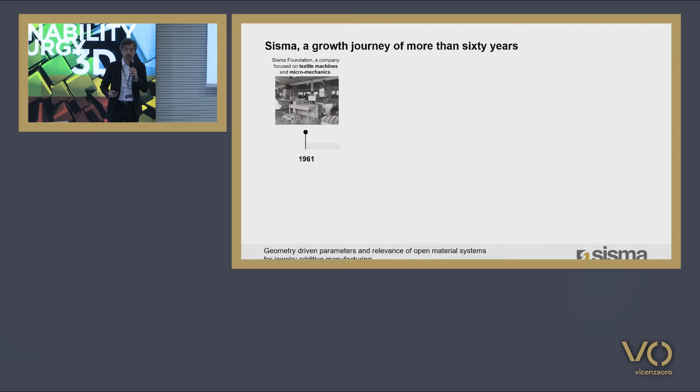Just a few words about Sisma. Sisma is a company that was founded more than 60 years ago. It started as a company that built micro-mechanics for textile machines, and the first production plant was built in 1967. In 1976, that marked the beginning of the jewelry machines production. So since 1976, we are building machines for chain making.

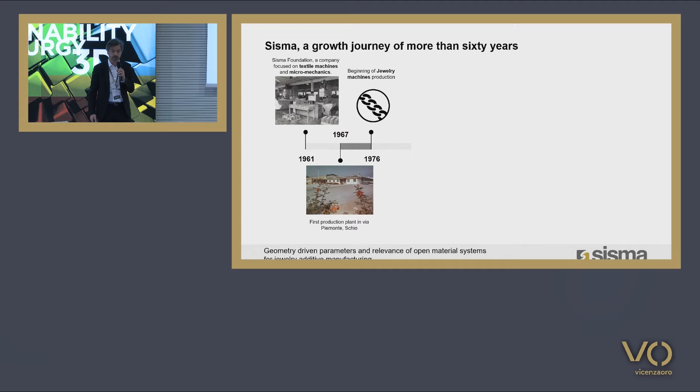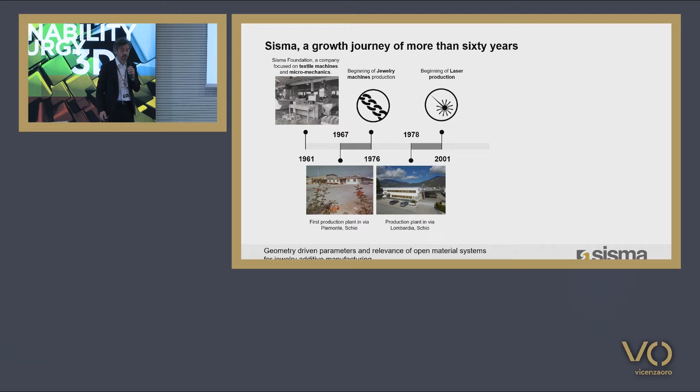Over the years, the company expanded, and since 2001, we are using and integrating and building laser sources. And following this laser knowledge, we started working with 3D printing machines. We started building 3D printing machines in 2014, and we did this also with a joint venture with a German manufacturer, Trumpf.

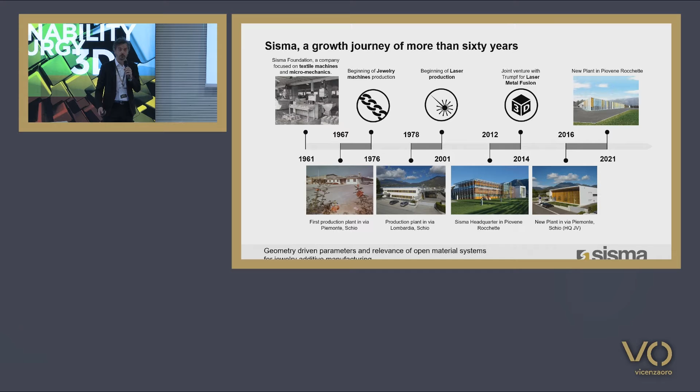The company expanded over the years, and we built several new plants, and now we have our own headquarters in Piovene Rocchette. So just to sum up, the company has more than 40 years of experience in jewelry making machines, more than 20 years in laser manufacturing and laser-based process, and more than 10 years in manufacturing of metal 3D printing machines.

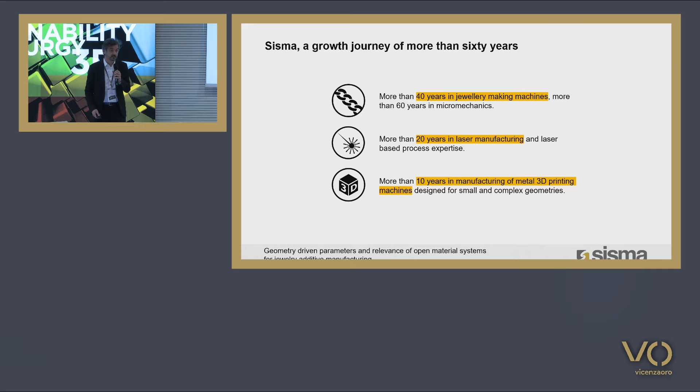So the first decision that we made when we started building 3D printing machines was that we wanted to have an open platform, an open system that could give freedom of choice to our customers, and also to experiment with the parameters. The possibility to adapt building parameters, we think, is crucial for having successful projects, especially in jewelry manufacturing.

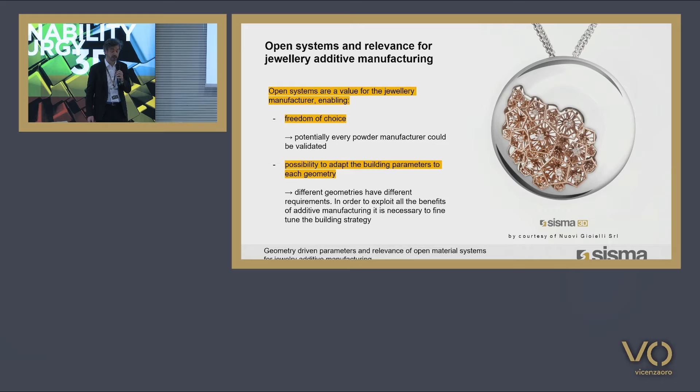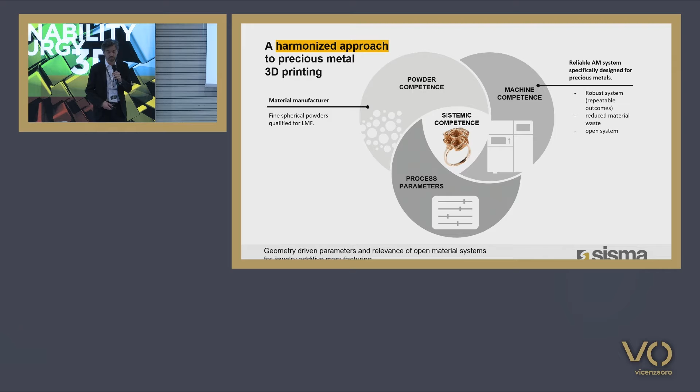So this is how we see additive manufacturing for jewelry making. We start from the powder competence. We partner with powder manufacturers that can produce fine spherical powders for laser metal fusion. We know that for jewelry making, it's important to have a robust system, but also a system that can reduce material waste. Precious metals are getting more and more important.

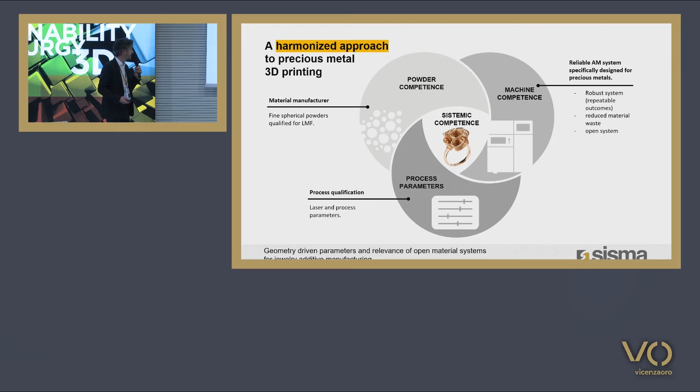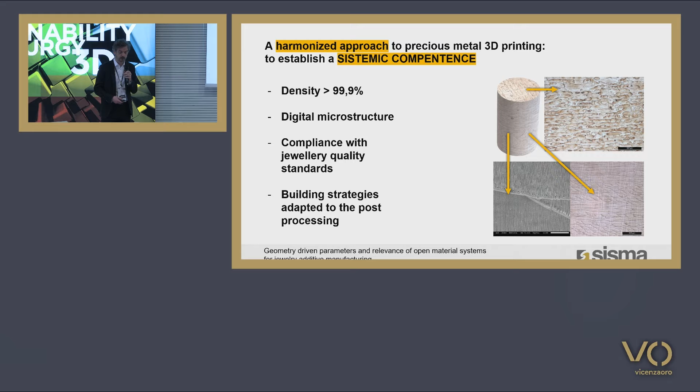And then we have the process qualification. We develop laser and process parameters. All this harmonized approach may give parameters for building high quality parts with a very high density. We call it digital microstructure, so very fine microstructure that can comply with the jewelry high quality standards. And also we develop the parameters in order to be adapted to the post-processing.

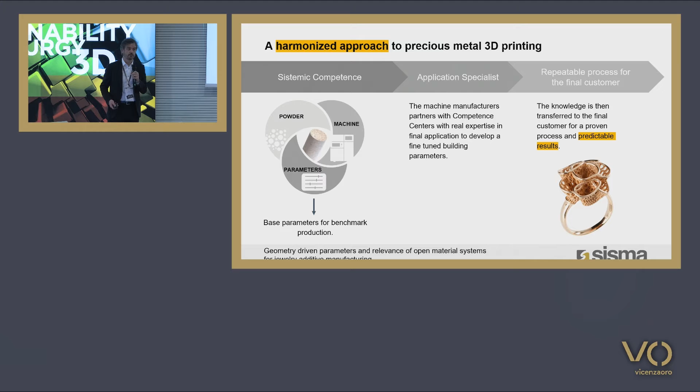But this is a systemic competence that only gives a metallographic competence. We understand that what's needed is to have a partnership with application specialists that can fine-tune the parameters on the actual jewelry geometries, and then can finally deliver a robust and predictable process for the end user. The benefit of having an open system, of course, is the fact that we can have really a lot of different alloys, and the list is growing.

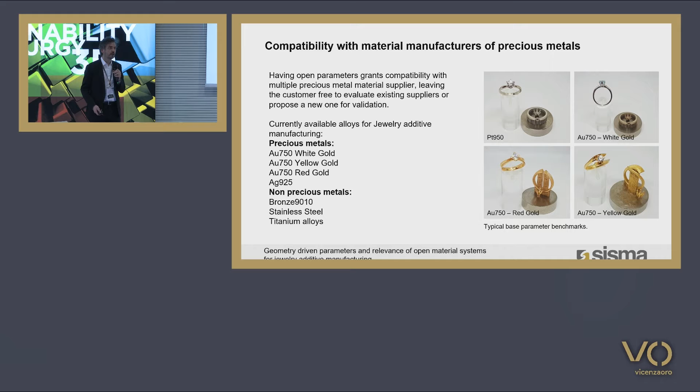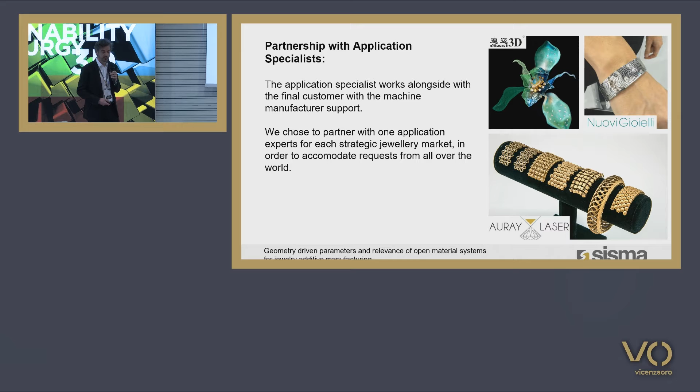Now, I will start with the actual presentation. Of course, we partner with application and competence centers in all areas of the world that can really transform the parameters and the additive manufacturing into final products.

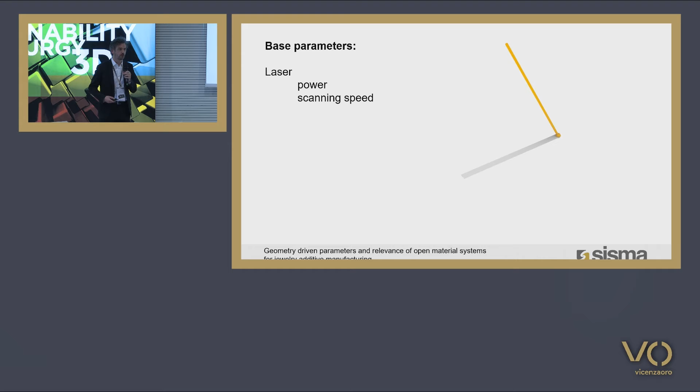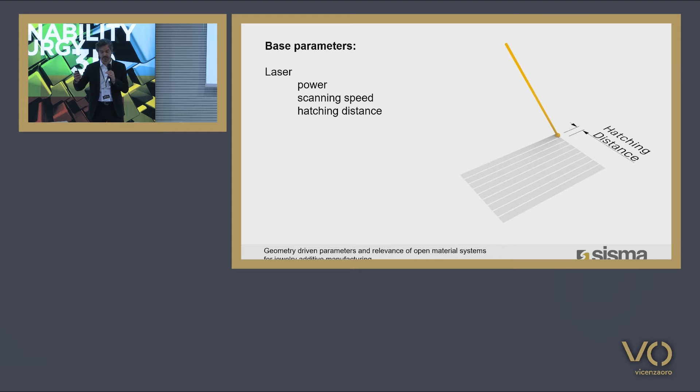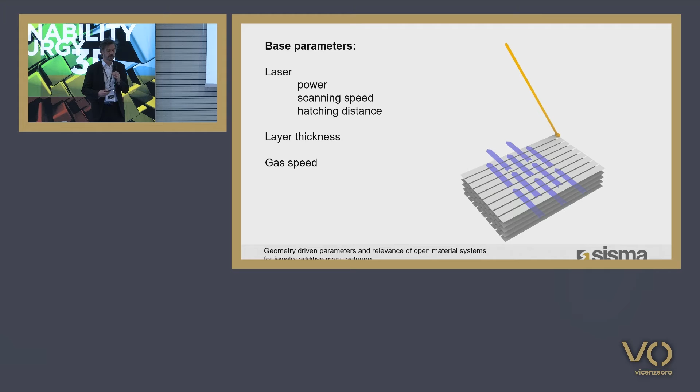So when we talk about building parameters, of course there are base parameters. Regarding laser, we have obviously laser power and scanning speed. Then there's hatching distance, we talked about this before, so the distance between all the laser paths. There's layer thickness, so the thickness of each layer that is being built. And then there's gas speed. But we focus on a lot more advanced parameters, and we like to give our customers all the freedom to really fine-tune the process.

So, for instance, when we talk about laser, there's, of course, laser power and scanning speed, but hatching, it's not just going back and forth with the laser, but it's also the ability to have different hatching strategies, different orders in the hatching, and also contours. Contours basically make what the external quality of the surface is like, and being able to vary all the parameters in the contours as well,

it's really important. Beam spot, we never talked about beam spot size today, so we think it's important to choose the right beam spot for the right application, whether the customer wants high quality, small geometries, or is more geared towards manufacturing.

Layer thickness, of course, the customer needs to be free of choosing the layer thickness, but also different protective gas. An open system might give the customer the possibility to choose different grain size, different from what standard grain size distribution is. And then, of course, all the laser and hatching and contour parameters are also present in the up skin and down skin. So all the areas that are on the bottom or on the top of the part.

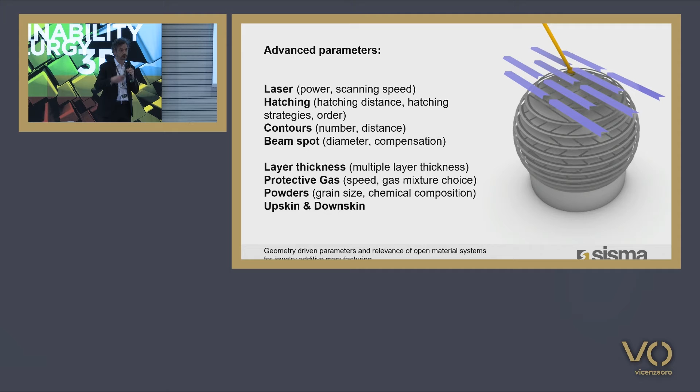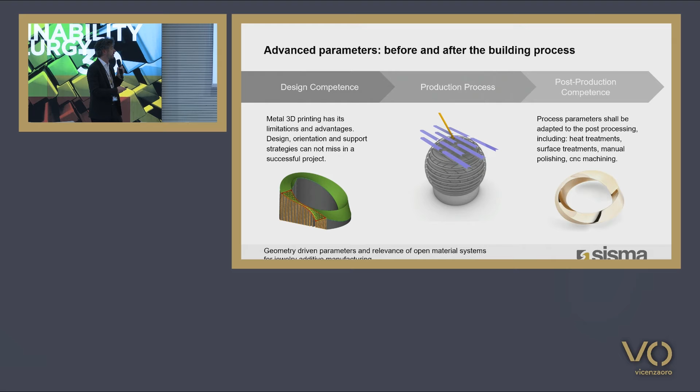So the advanced parameters are not only what happens inside the machine, but we like to think about all that happens before. So when the customer designs a part or orients a part for additive manufacturing or designs the supports, all these parameters need to be adapted to the actual post-production that has been chosen. There's not a perfect parameter, there's only a perfect parameter for the actual workflow.

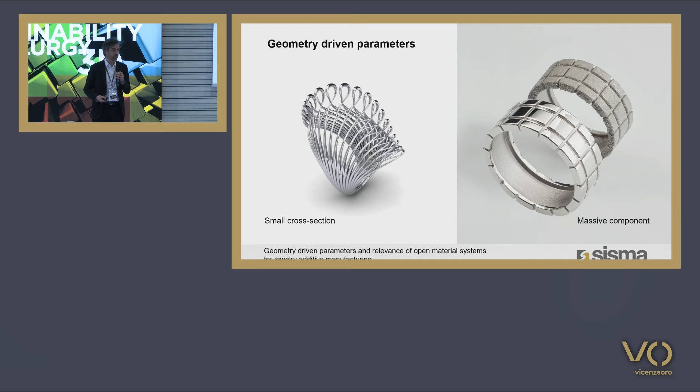So just to give you an example, these are basically 2 examples of 2 rings. So similar object, but different geometries, same material, but one has a really small cross section, and the other one is a massive component. You cannot use the same building parameters for these two objects. So a small part might have different validation criteria, so the surface quality needs to be as good as possible as built. There's thin wall section.

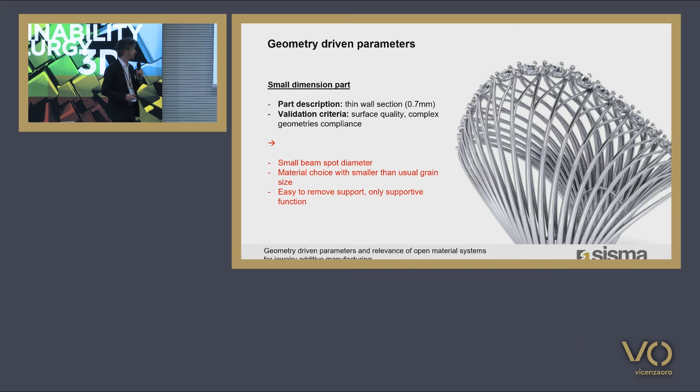So when we talk about advanced parameters, of course, we will take into account maybe the beam spot size. We will try to choose a machine with a small beam spot size diameter. Material grain size distribution might be fine-tuned for the actual project, and the supports, as we discussed before, will only need to have a supporting function. They're not anchoring the part. There's no need for heat management by the supports, and that's completely different when you're looking at the same object,

so a ring, but a massive part. So in this part, the wall thickness changes along the geometry, and maybe the validation criteria change. Build speed becomes more important. Maybe the actual value of this part is in massive production. So when we look at a part like this, it's still a ring, but we will choose a bigger beam spot size. The supports have a completely different value because they are managing heat exchange, and they are not only supporting the part, but also anchoring the part to the platform.

And there could be some benefits from preheating to manage internal stresses, and adaptation of skin and core parameters, so different parameters for the outer surface and the inner surface in order to increase even more the build speed. So we looked at 2 different examples, 2 different rings, but they need completely different building parameters.

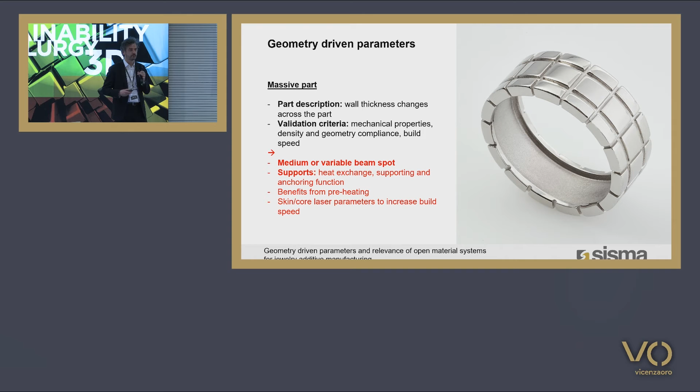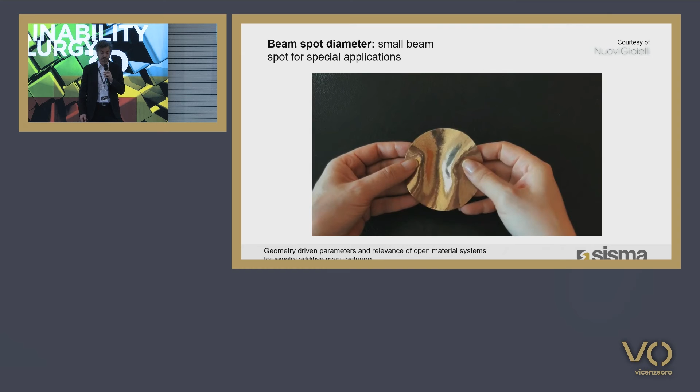Another example, courtesy of our partner Nuovi Gioielli. This is a textile built basically with metal additive manufacturing. In this technical example, there's no correlation with conventional technologies, so it's something really new, and the whole part is completely interlaced. But in this case, parameters play a huge role in being able to have the correct functionality of the part.

So the part is not changed in the CAD file, but it's basically modified by the building parameters. So the actual dimension of each square could be changed and fine-tuned with beam compensation parameters. So basically the distance from the actual CAD file to the path of the laser.

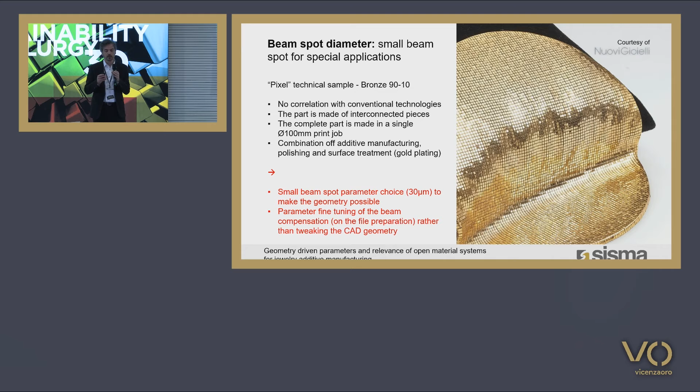Now I would like to talk about titanium. It has been really a hot topic today. A lot of the people before me talked about titanium, and we think it's interesting because, first of all, there's a growing trend in jewelry regarding titanium, and it has some obvious benefits. It weighs a quarter of gold, so bigger items could be worn and still be comfortable.

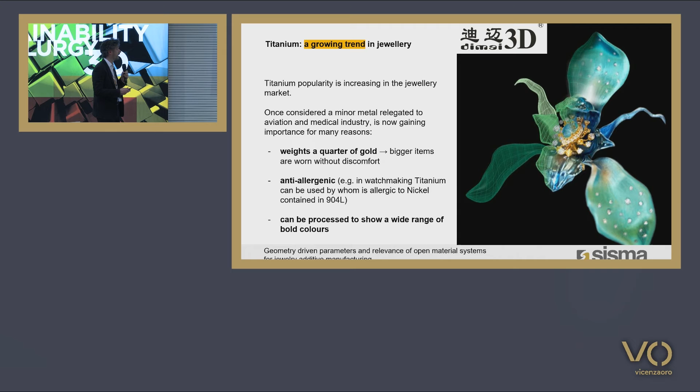It's anti-allergenic, so it's, let's say, a medical grade material that is used also in jewelry making for this reason. For instance, titanium cases can be worn by people that are allergic to nickel. So in watchmaking, titanium could be interesting for this reason. And it could be processed, as we saw in the presentation before, with a wide range of anodization, in order to have really new and bold colors.

So we focus on titanium because titanium is difficult to machine and process with traditional technologies. Traditional processing of titanium is really costly. Machining is really difficult and could also be dangerous sometimes. Those of you that are working a lot with milling machines know that with titanium you need to slow down the speed of milling in order to avoid unwanted hardening of the metal.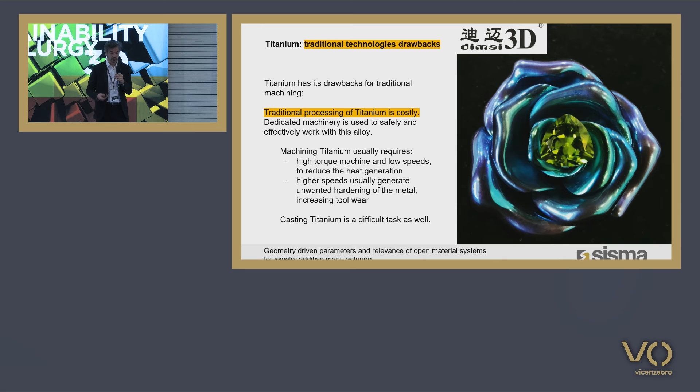So machining is slow. As we saw today from a presentation before, casting titanium as well is a very difficult task. And why titanium for 3D printing? Well, titanium is not only an interesting material, it's one of the materials that can be printed more easily. It's probably the easiest material to print, for different reasons. It's highly self-supporting. It really needs a small amount of supports, which leads to a small amount of post-processing.

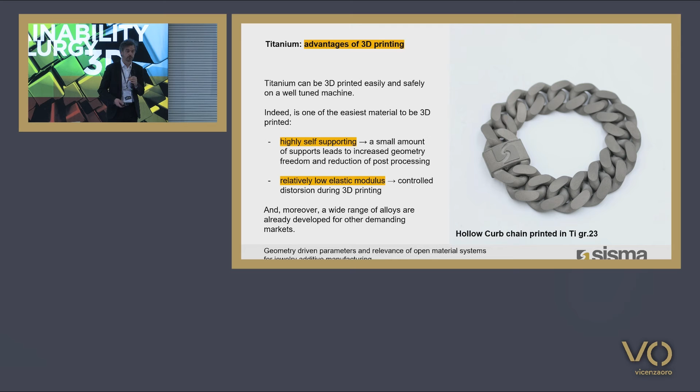It has a relatively low elastic modulus, so the distortions during the process are limited. And a wide range of alloys are already developed for other markets. So if we look at all the alloys available, we have, for instance, titanium 6.4 grade 23. It's quite hard, so it might be difficult to polish manually, but it's really a benchmark material for all the additive manufacturing industry.

We have titanium grade 1 and grade 2, so almost pure titanium. The hardness is lower, and it's really interesting for small shops, small jewelry shops. And then we have titanium 6.4 grade 5, already widely used in the watchmaking industry, and it might be considered a benchmark in the watchmaking industry.

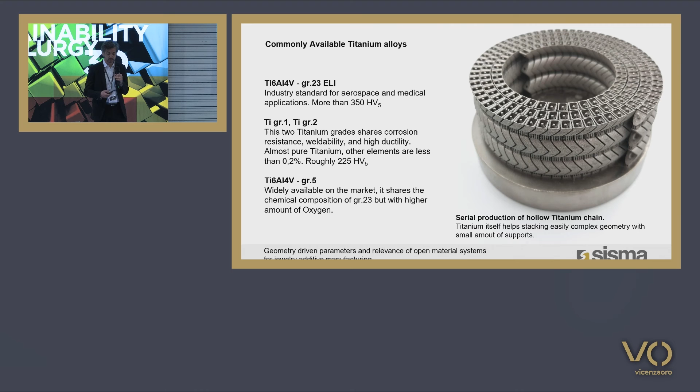But for most of these applications, grade 23 might be the best choice. It's basically similar in terms of chemical composition, but it's more pure in terms of oxygen and contaminant quantity. Then I would like to talk about a new alloy that has been developed by the University of Trento. It's an alloy that has optimal biocompatibility. Of course, it's an alloy that might have a lot of interest for medical applications.

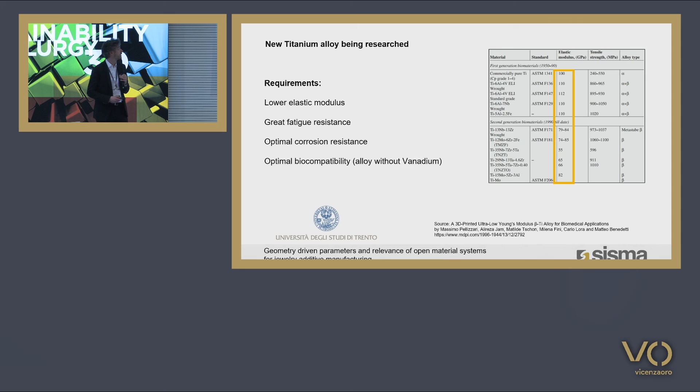But it also has optimal corrosion resistance. It's completely without vanadium, so it has optimal biocompatibility, but also can be in contact with the skin without any issues. So the new material has been developed by the University of Trento, you can find the source for their document here, and we did all the manufacturing of the samples, and we found that this new material has even higher buildability than conventional titanium 6.4, so it needs even less supports, and it's also a material that can be heat treated without using argon and at lower temperatures.

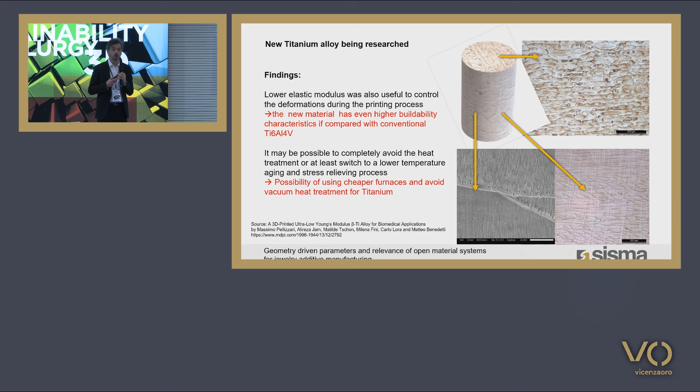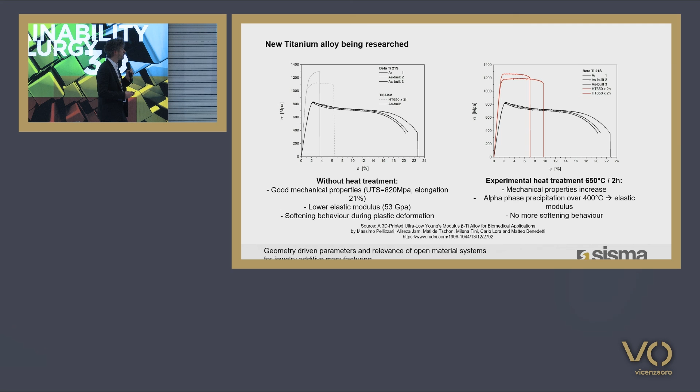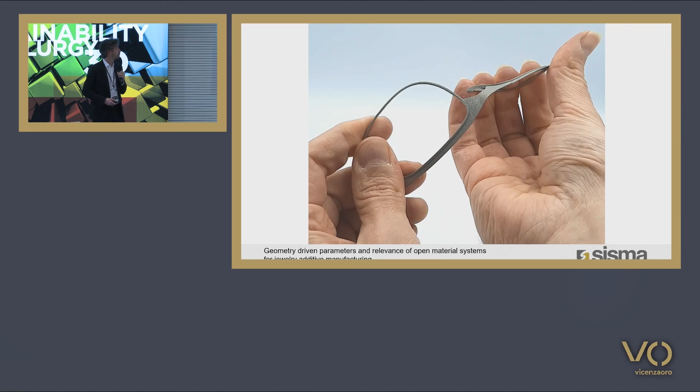So this is a comparison of titanium 6.4 grade 23 and this new alloy. Without heat treatment, we see that elongation is quite impressive. And with a simple heat treatment at only 650 degrees Celsius, it could reach and outperform titanium grade 23 in many ways. So this is an example of what can be done with this new alloy.

Of course, the first application that comes to our mind was the eyewear industry. It's an almost unbreakable material, but we think that with the possibility to have new features like flexible designs in jewelry additive manufacturing, this could be a really interesting material.

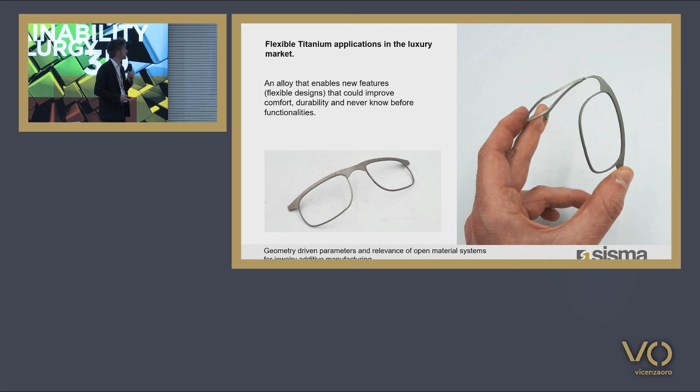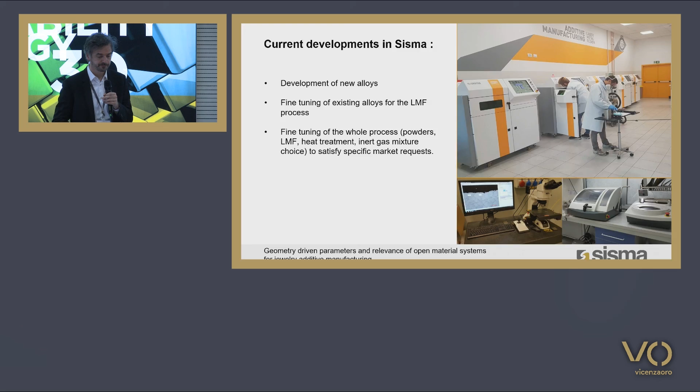Just to wrap up, this is what we do in Sisma. We focus on the development of new alloys for additive manufacturing. We are fine-tuning existing materials, but focusing on the actual geometry and the actual application. And we are taking care of the whole process. We understood that finding the right parameters was possible only taking into account powders, the building process, heat treatment, and also the post-processing. So thank you very much for your attention.